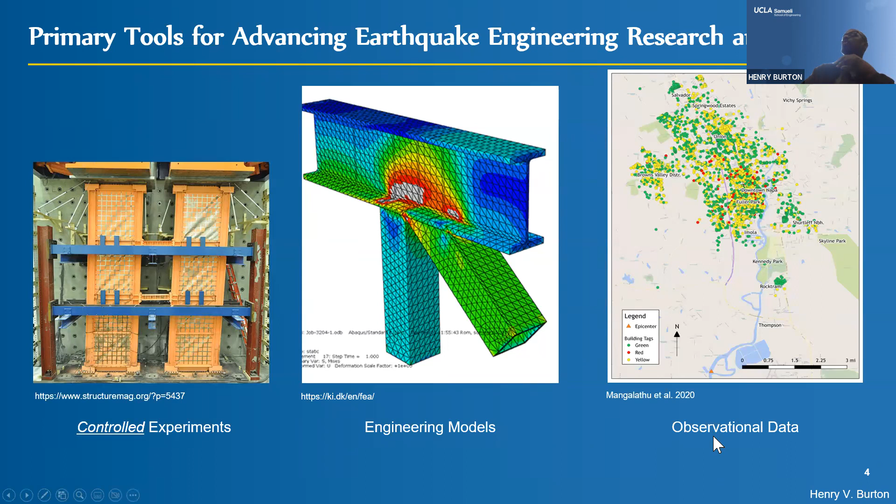For example, we collect a lot of data on beam column experiments, and there are folks who collect that data and develop statistical models with it. When those experiments were carried out, they weren't done with these data-driven models in mind exactly—they were carried out to investigate specific things. So if you take a bunch of data from those experiments and put them together, I'd characterize that as observational data.

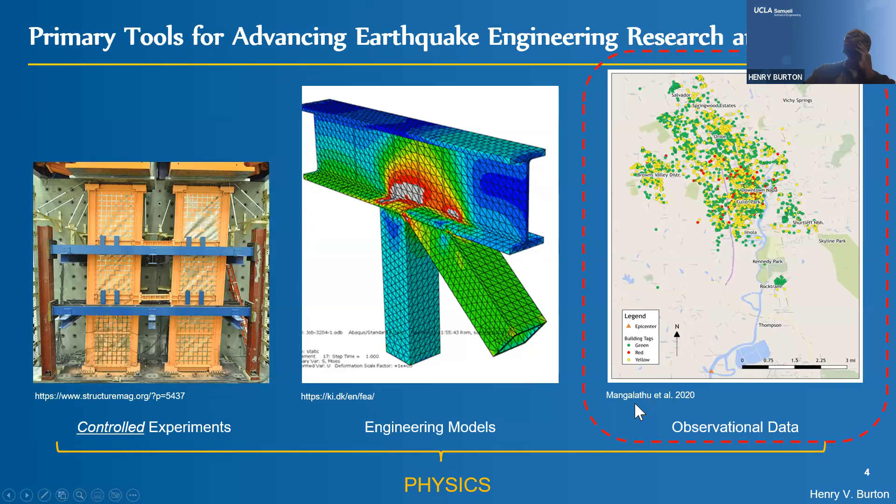And obviously these things don't happen in a vacuum, they're related. You use experiments to calibrate models, you use observational data to inform experiments. So depending on the investigation, there's usually one driver of whatever it is you're looking at. Today we're going to primarily focus on our use of observational data.

So where do we get this data from and how do we use it? I used the example of physical experiments earlier to distinguish between a controlled experiment and a set of experimental data that falls into the observational data category. For different types of structural components, systems, or subsystems, over the years we've done quite a bit of experiments as a community, and there have been various efforts by researchers to pool that data and use statistics, and more recently machine learning, to infer things from it—mostly to develop predictive models. That's one way we use data and where we get it from.

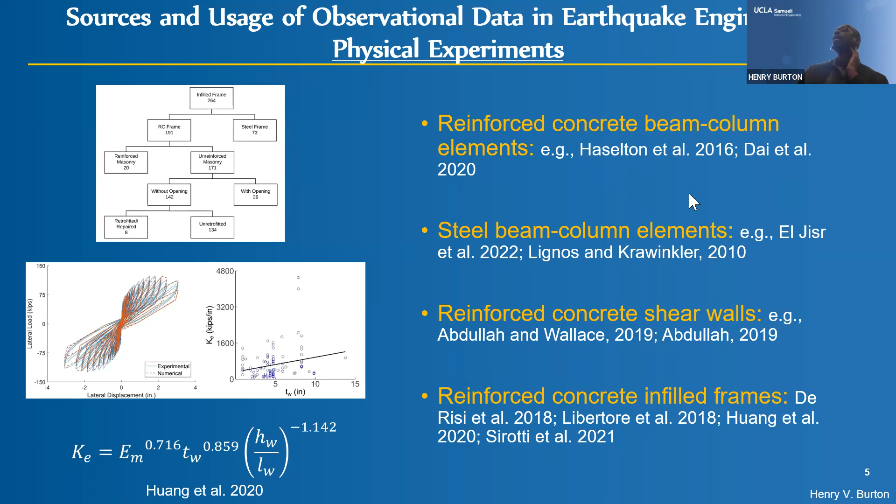Another source of data is field reconnaissance. This is obviously very important, and more recently we have several organizations dedicated to doing reconnaissance in a systematic way, to maximize the amount of information we get from the data we collect. When we collect that field reconnaissance data, we use it for various reasons.

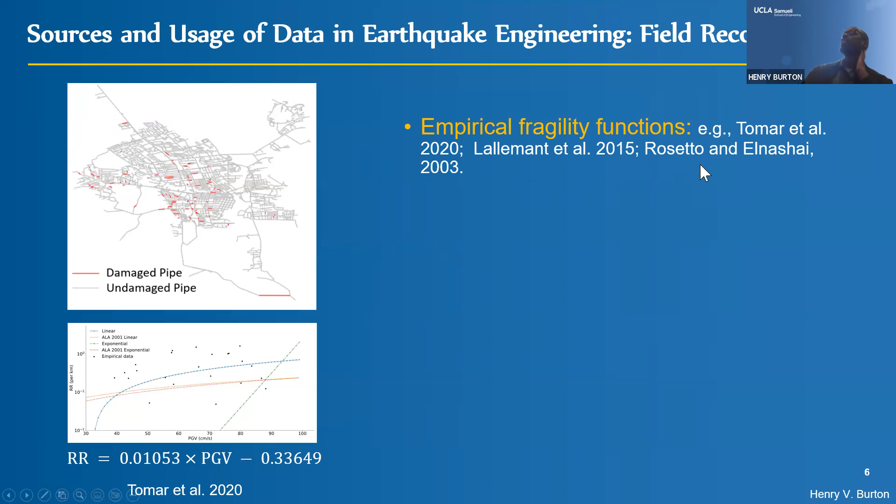For example, if we have damage data, we might use it to develop fragility functions. We might perform statistical analysis to look at correlations between different properties of our infrastructure or the hazard and the things we observe. There's also the development of predictive models using machine learning, which is of interest to a lot of people these days.

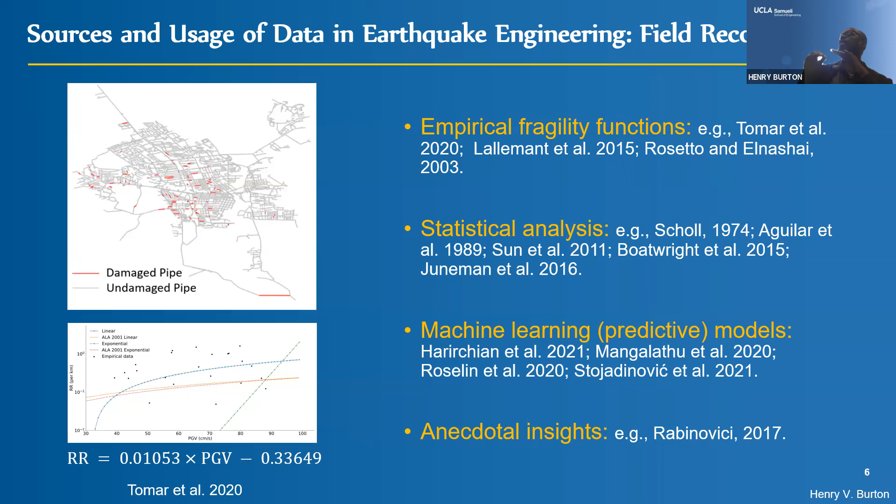And a lot of times we're able to draw anecdotal insights from this field reconnaissance. I say anecdotal meaning there's not enough observations to allow us to do a systematic assessment of, say, the effect of property A on the damage. But maybe we've seen one or two situations that we think serve as some evidence, though it's limited in terms of the strength of evidence it provides.

We also use data within our simulations. Simulations are interesting, because obviously when you're doing a simulation, it's more in the category of an engineering model. But when we do simulations using ground motions—where we're interested in the effect of some particular ground motion property like duration, pulses, basin effect, spectral shape—more often than not we're using empirical ground motions, recorded ground motions from real events. I'd put those records in the observational data category because we don't really have control over the ground motions that happen.

The ground motions are controlled by the earthquakes, and the earthquakes are controlled by nature, so to speak. So I would put the ground motions in the category of observational data, but we use them in the context of numerical simulations.

Another way we use data is from response measurements. We have sensors that we can place in buildings to record the responses, and we can use these responses in different ways. We can use it for response reconstruction, meaning for a given structure, you measure part of the response and you're trying to recreate the response in another part of the structure.

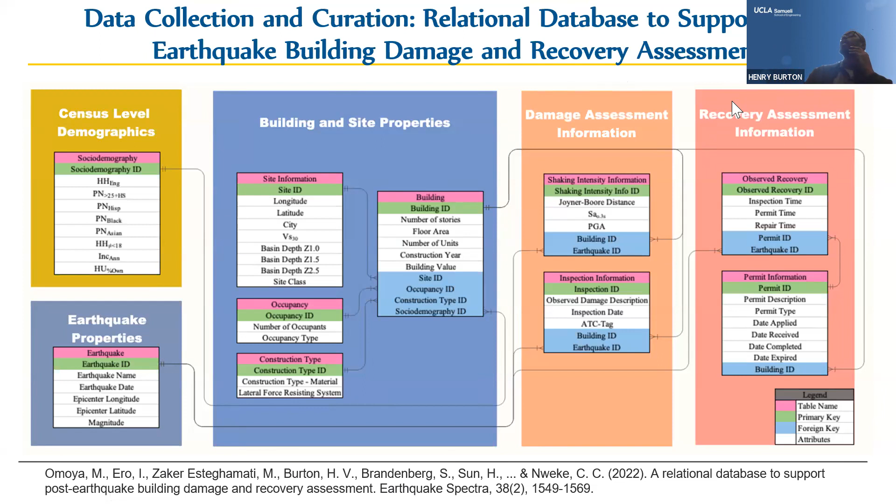This is an example of a database that we put together, a relational database. It's meant to support post-earthquake damage, building damage, and recovery. One of the things you'll see is that journal papers are creating a new category called data papers, where the group that puts together the data and organizes it and writes it up clearly would get credit for your data every time someone uses it.

As we look to the future, I would encourage us to think, instead of in terms of different types of data in different databases, in terms of knowledge systems. Imagine you have a system where you can ask a question, and the answer is given based on data, but also based on prior knowledge and maybe some engineering models that you have, all working together.

This is an example of a knowledge system that was developed by Moriba Jah. He's actually an aerospace engineer from University of Texas. This particular knowledge system is for tracking space debris.

It's done using what's called a graph database. But the interesting thing is that it doesn't just contain data, it actually has data, models, and other general information that are all talking to each other. If you have a question, you can query this knowledge system, and depending on the level of intelligence, it would actually be able to query the models, the data, the prior knowledge that's in there to answer these questions.

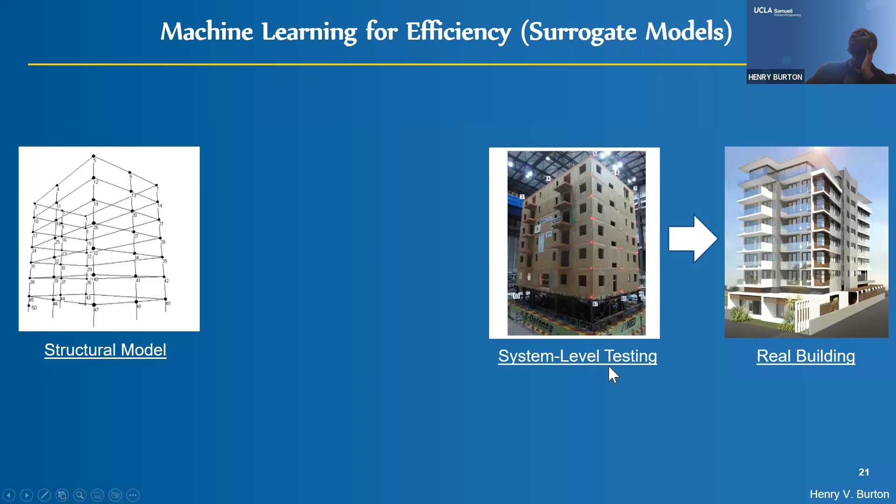And we do different things to close that separation gap. So for example, we do system level testing. If our model is informed by system level testing, then it's going to be better. And oftentimes we might do component level testing, which is not as good, but it still gets us good information. So one way to think about this is that at each of these steps, there's some error or uncertainty introduced. If you build a structural model just based on component level testing, there's a certain level of error, whereas if you build it based on system level testing, there's a certain level of uncertainty.

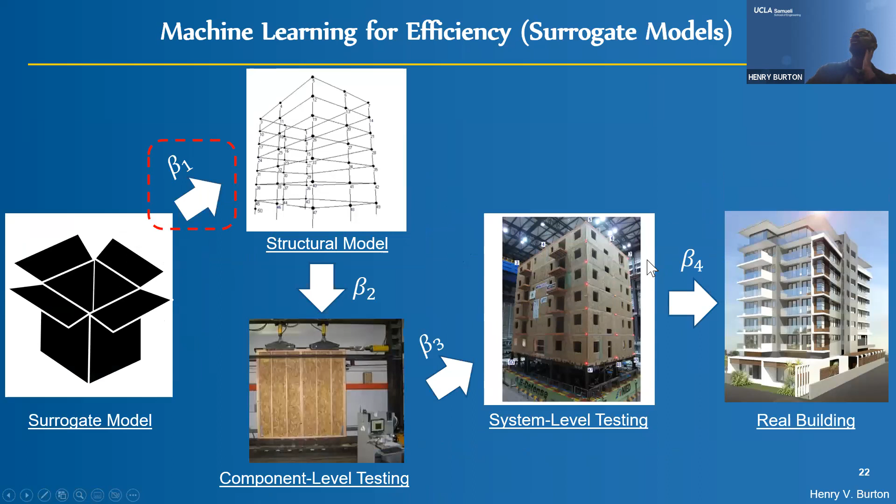So if you think about the surrogate model, one of the things we're doing is introducing an additional uncertainty layer into the model. Because remember, the surrogate model is being trained off of our simulation model. We don't have enough system level test data or even response measurements from real earthquakes to develop the surrogate model. So oftentimes we're using structural simulations to do that. And so we're putting more distance between the model we're going to use for making decisions and the real building. So that's something to think about.

So one interesting question is, how big is that uncertainty relative to all of the others? Is it a lot larger than, say, beta 2, beta 3, and so forth? Or in general, is the uncertainty in our surrogate model much larger than the uncertainty associated with, say, the choice of the finite element model we choose, or even the model parameter uncertainty? So it would be nice to get a sense for, when we quantify the errors in our surrogate model, where that fits in terms of all of the other errors or uncertainty that we typically work with.

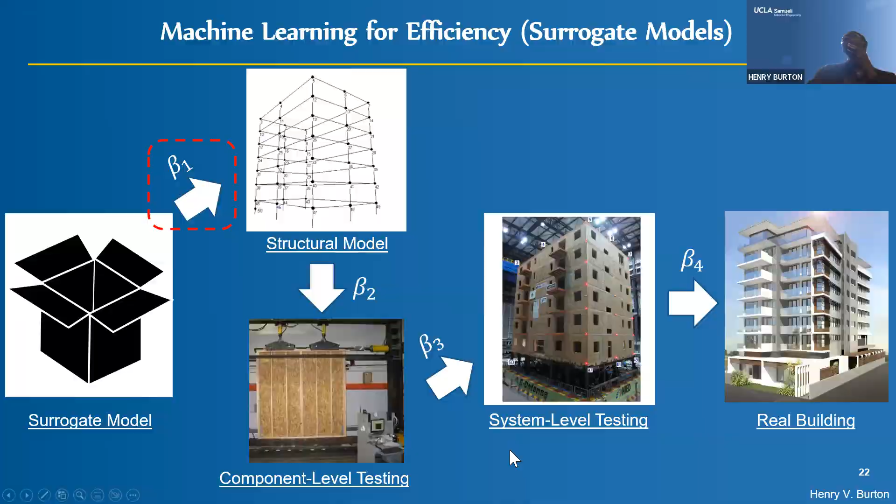So if we're just using automation, we don't introduce that additional layer of error. It may be the case that even with automation, we still have a certain level of computational burden and the surrogate model is still needed, but it's not always clear that's the case. So I think something we need to start thinking about is how do we balance the use of automation in terms of mechanistic simulations. By mechanistic, I mean we're explicitly simulating whatever phenomena is of interest versus using surrogate models. I think there's a balance that needs to be struck there, and at this point it's not really clear to me what that balance is, and I haven't seen anyone investigate that in detail.

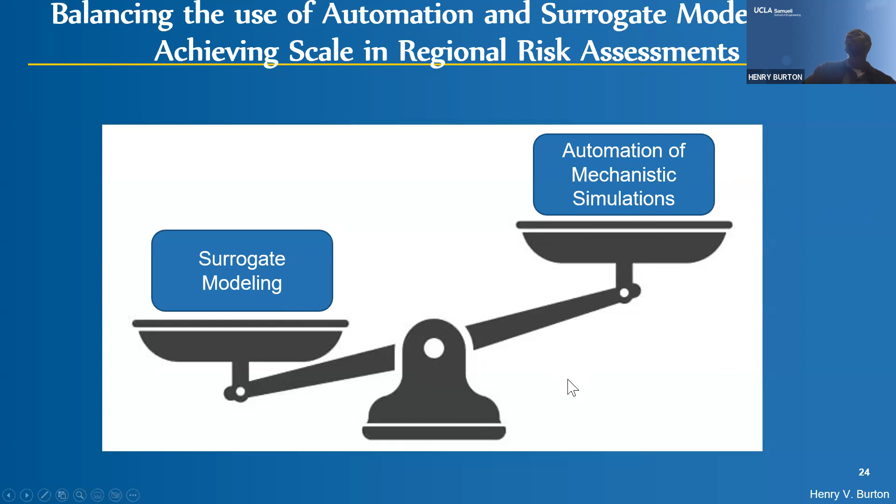Okay, so moving on to a different type of use of machine learning models. As I mentioned before, we have a long history of collecting data and using traditional statistical methods to develop predictive models.

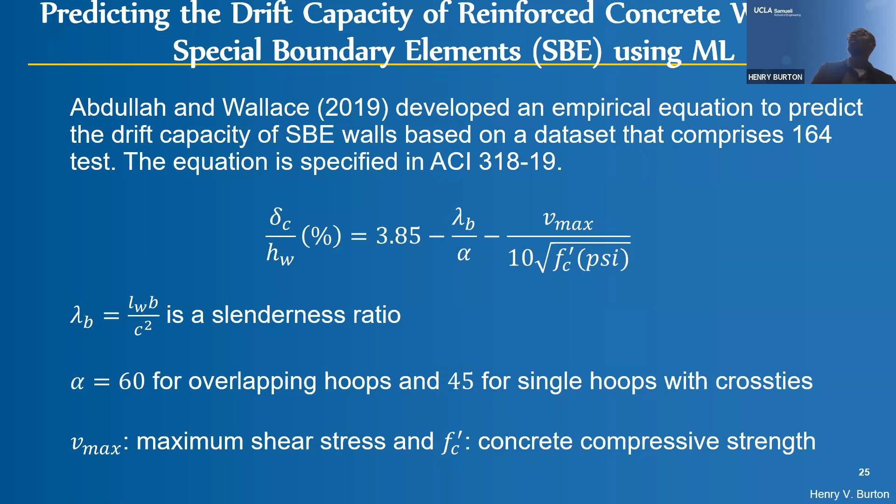And so a natural question is, well, if you use machine learning, what does that get you, right? So in this particular study, we were looking at the drift capacity of reinforced concrete walls with special boundary elements. There was a linear model that was developed by Abdullah and Wallace that's currently used in ACI 318. And then we said, okay, well, can that model be improved, at least in terms of accuracy, using machine learning?

And so that's what we did here. And we end up finding that the answer is yes, it is improved, at least in terms of accuracy. Now, I mentioned at the start of this presentation that improvement in accuracy, it's not a free lunch, right? So it does come with some trade-offs. And one of those trade-offs, I hesitate to say it, but let me say it and then I'll let you know why I'm hesitating.

So one of those trade-offs is the idea that machine learning models don't naturally provide explanations for the results that they give, right? You hear that a lot. I'm sure you've been seeing a lot of papers on explainable machine learning models, right? And the whole idea is, can you do some things with your model or the results that you get out of it so that it can let the user make sense of how the model is interpreting the relationship between the input variables and the output variables, right? So that's sort of a general argument.

My view on it is that we are entering an era where, historically, as engineers, we like empirical equations, we like analytical equations because we can immediately look at them and tell how a particular variable is related to our outcome. So for example, you can look at this and see that a higher shear stress means a lower drift capacity, right? So it's sort of intuitive.

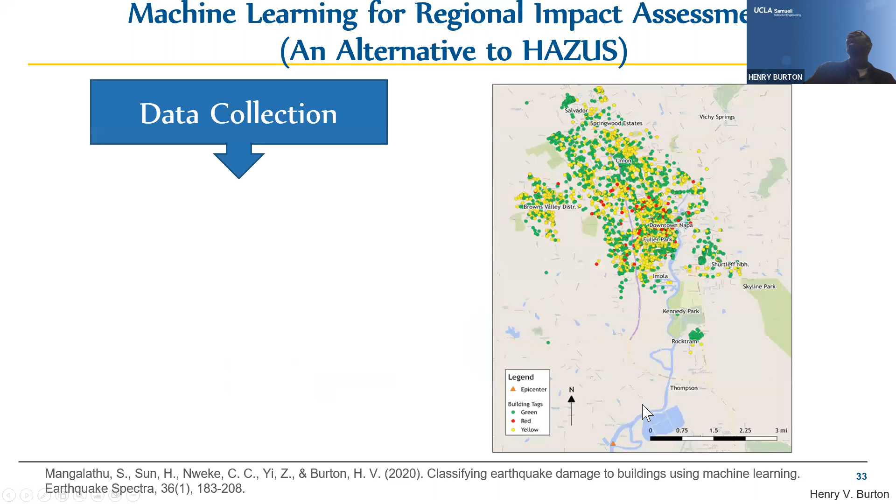This is another application that involves regional damage assessment. So you have some data collected on building damage after an earthquake. You train a model, in this case a classification model to predict the tags. And so some of the questions that come out of that are, how does that model perform relative to Hazus? I haven't seen anything like that out there. Can we make the machine learning model as interpretable or more interpretable than Hazus?

In the study I showed you, we trained a model on the Napa earthquake, and we did our due diligence, we did our training testing split, but the split was still in the context of a single earthquake. So what if we took the model developed from the Napa earthquake and applied it to Northridge? That obviously has implications to the generalizability of these machine learning models.

And related to generalizability, how many events do you need to consider in your training data to make the machine learning model generalizable? As you think about that question, you need to be comparing apples to apples. So you have to ask the same question about the traditional model, and about Hazus. Because Hazus, while it does have some engineering built in, is largely a data-driven model. So if you're going to ask that question of machine learning, you have to ask it of Hazus too, assuming you're trying to figure out which one is more useful.

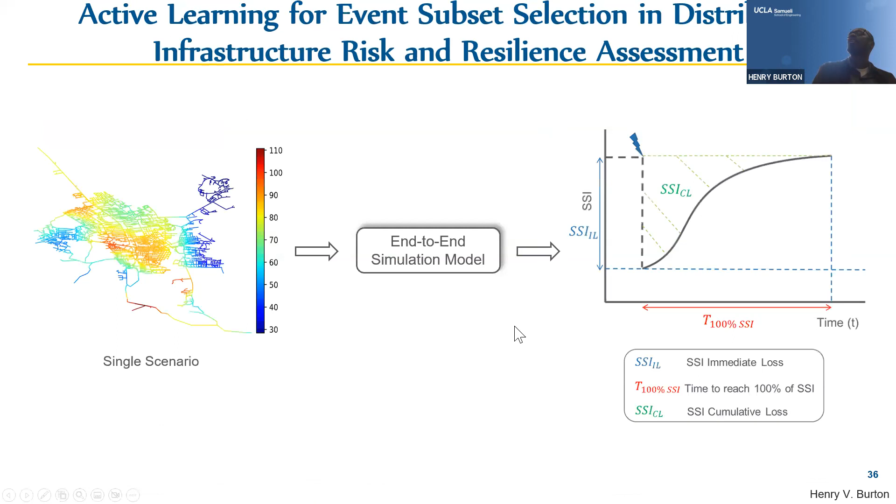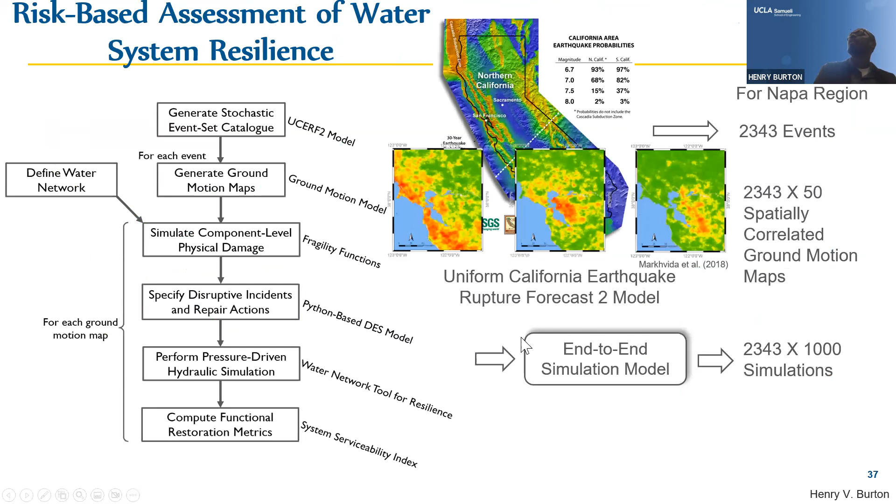And we can do this end-to-end simulation for a single event, but we can also do it for a full spectrum of events: a risk-based assessment where we consider all the possible events that can affect the region and combine the results probabilistically. That gets computationally expensive with multiple events. In this case, we were looking at the Napa water system, and each simulation can take anywhere between 2 and 6 hours, depending on the level of damage.

We did use parallel computing, but in our case, we used UCERF2, which had 2,300 or so events. If we used UCERF3, the number of events would increase by a factor of 100. What if we looked at a larger system? Napa has about 612 kilometers of pipe. In Los Angeles County, you're talking about a factor of 20 in terms of the amount of pipe, so obviously a much larger model. And the type of metric you use can also affect the model complexity.

So we use active learning. The idea behind active learning is that you can incrementally select a subset of the events and run the end-to-end simulation.

And the answer you get would be similar or close to the answer that you would have gotten with the entire event set anyway, right? So that's the basic idea behind active learning.

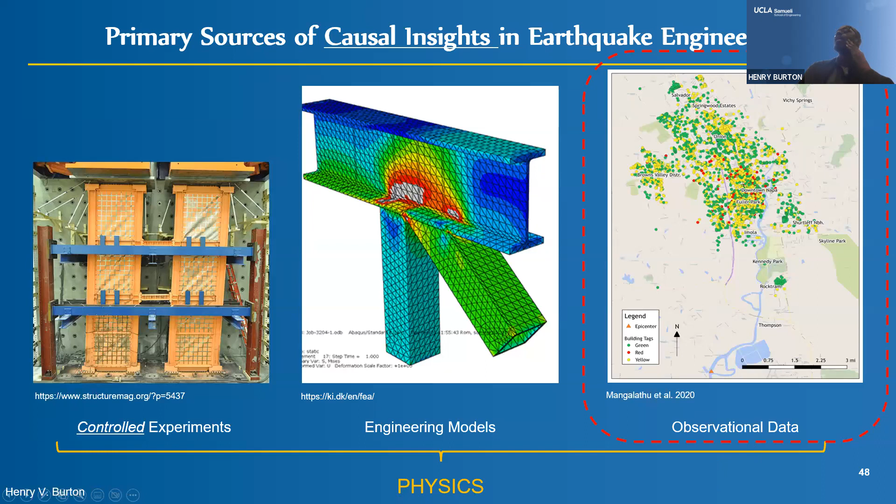The other level is the level of intervention. This is where you ask what if questions. What if I intervened in a particular way? How would that change my observation? And at the top is the level of imagining and retrospection, where you start talking about counterfactuals. And so my argument is that in terms of the earthquake engineering tools that we have at our disposal, we can get associative relationships out of all three of these things. I would argue that at the intervention level, we can get that from simulation models and physical experiments. We cannot get it from statistical analysis of observational data. And you can throw machine learning in there as well.

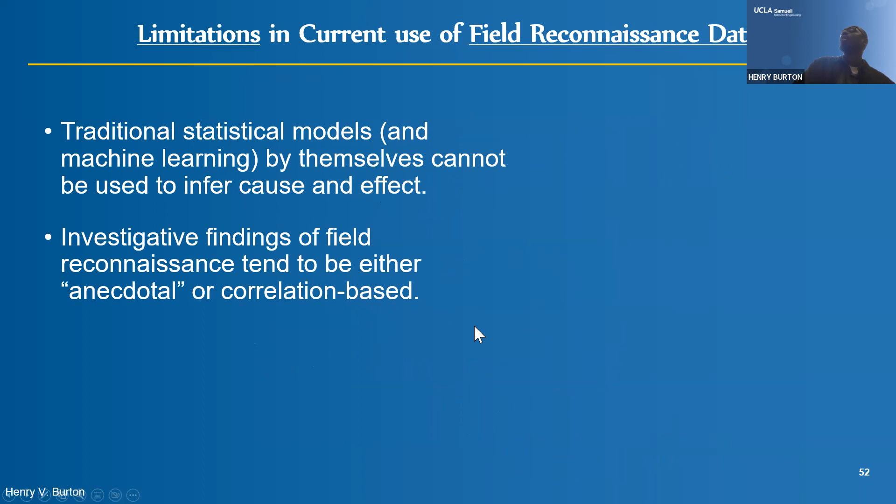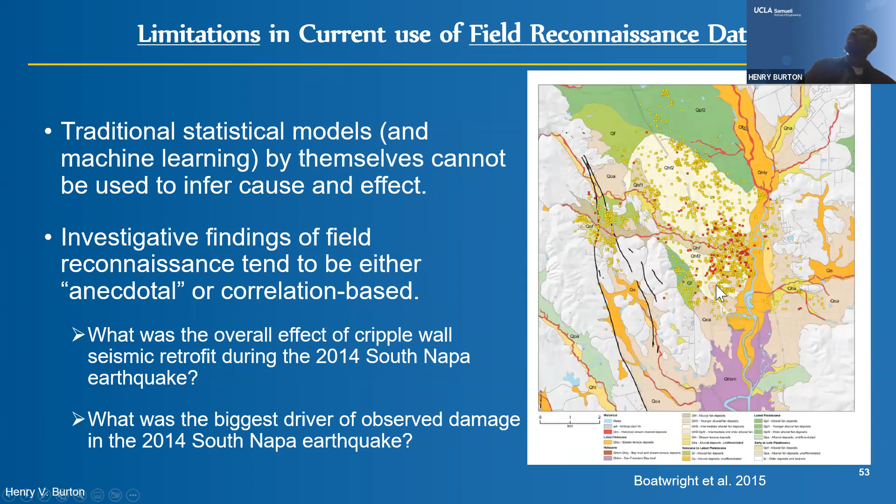This is another example that involves the South Napa earthquake, and there was the question of whether or not basin effects were responsible for the damage. There was an investigation, but they found that there are other things that could have caused the damage, like the age of the building and so forth. So at the end of the day, they came out with correlation-based information.

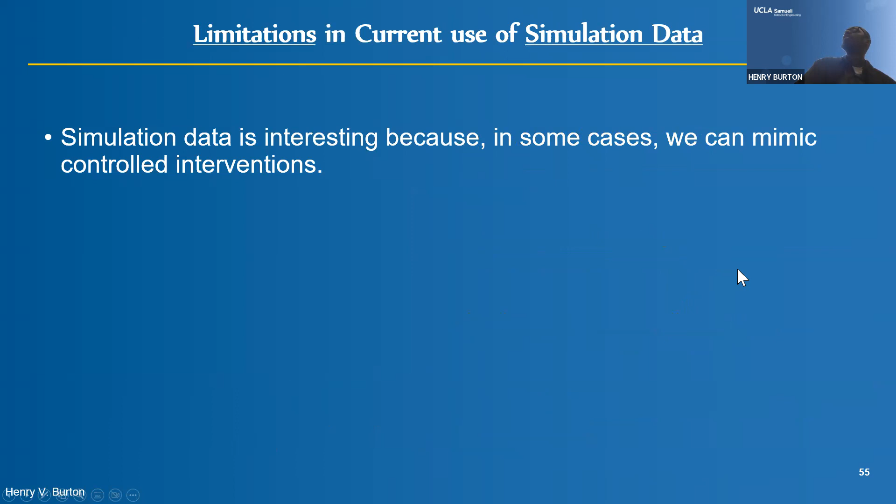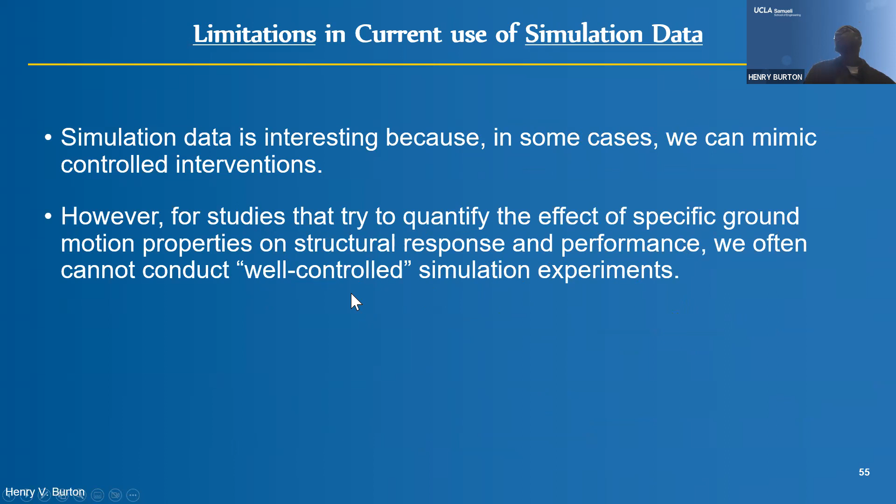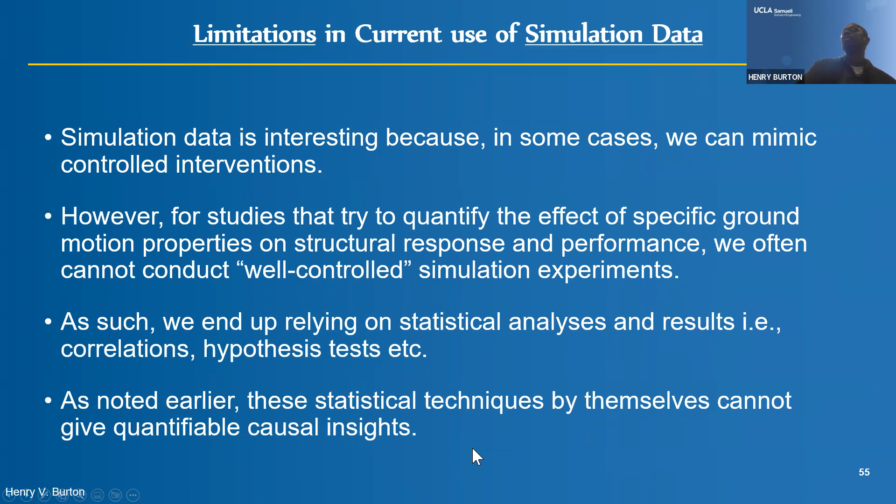There are similar types of limitations for numerical simulation. I mentioned simulation is interesting because in some cases we can mimic controlled interventions, but if we're trying to quantify the effect of specific ground motion properties, then we cannot conduct well-controlled experiments because we don't have complete control over the characteristics of the ground motions, assuming that we're using recorded ground motions. So we're relying on statistical analyses and correlations. And again, these statistical techniques by themselves cannot give quantifiable causal insights. The same applies to response measurement data.

I'm going to skip the next few slides. The point I was trying to make here is that we have a unique relationship to the causal versus associative thing, because in a lot of cases we quantify things based on associative relationships, but we know that there's a causal relationship. We can say that, yes, there is a causal relation, but we're not necessarily quantifying it. And I'm saying that we can do better than that.

So final thoughts. You often hear machine learning is just a tool, and it is just a tool, yes, but it can be very powerful. And so it's important that you use it in the right context. For us, it shouldn't be about the algorithms themselves. Wanting to do machine learning for the sake of just using machine learning, I think the time for that is past. We've done a lot of that within the past 10 years. So think carefully about the problem that you're trying to solve and what purpose machine learning is serving.